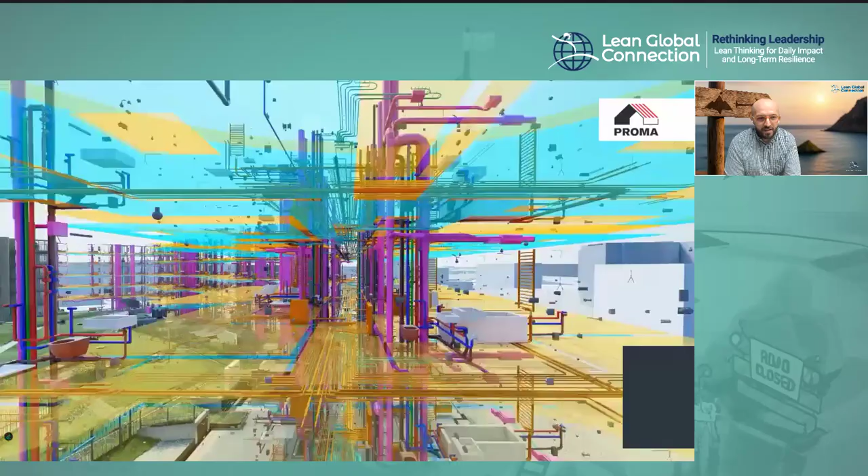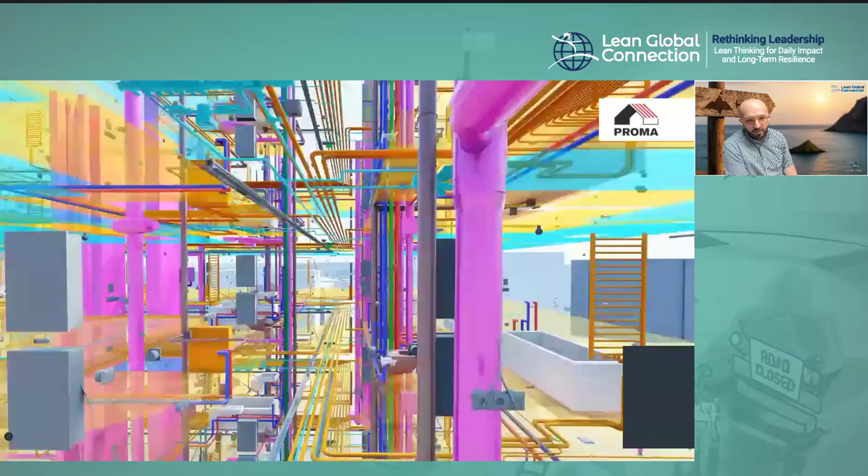It's BIM modeling. So if you are from the construction industry, you already know what it is. It's like a digital twin of the building you're going to build. This is our current project we're building in Slovakia, a project named Zwirn. And you see the detail in which we model everything. When I saw it the first time, I was totally thrilled. For the building we are going to build, we have every nitty-gritty detail.

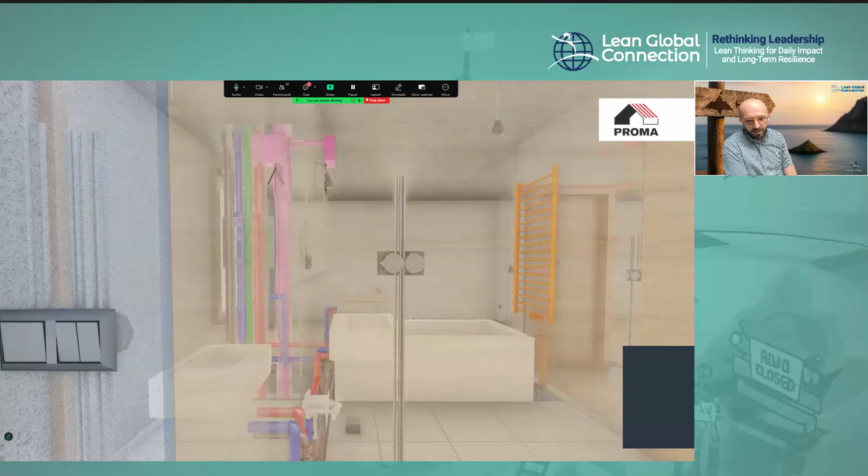You see the corridors, you see all the pipes, you see bathrooms, tubes, you see even valves in each room, on each pipe where it is necessary. So yeah, a little bit of roller coaster and introduction of how we actually design buildings. It's the 21st century, so many companies do that. I'm still amazed how the technology progresses.

And we don't just design buildings in BIM modeling, but we can even compare different ways of constructing them. We can go to gradual construction, we can go to combined construction, and we see which goes faster. So we check the construction duration time. That's the basic intro, and the main thing I like to mention, and I will come to it very often during the whole presentation, is size. The size matters in construction.

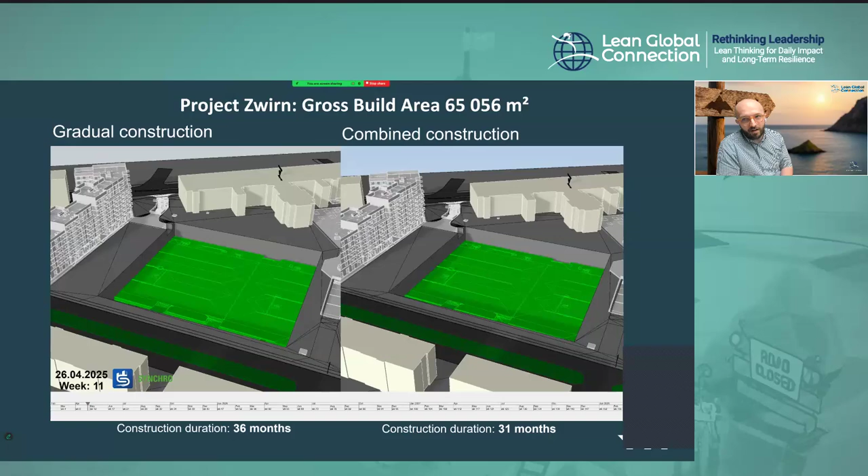You can notice that the project gross build area is 65,000 square meters. I will repeat it because this is quite important information to start with. That's how we actually define the size in construction: gross build area, 65,000 square meters. And the second thing we check is the construction duration time, so lead time in lean terminology. We can combine different ways, and we can choose the one that fits the best.

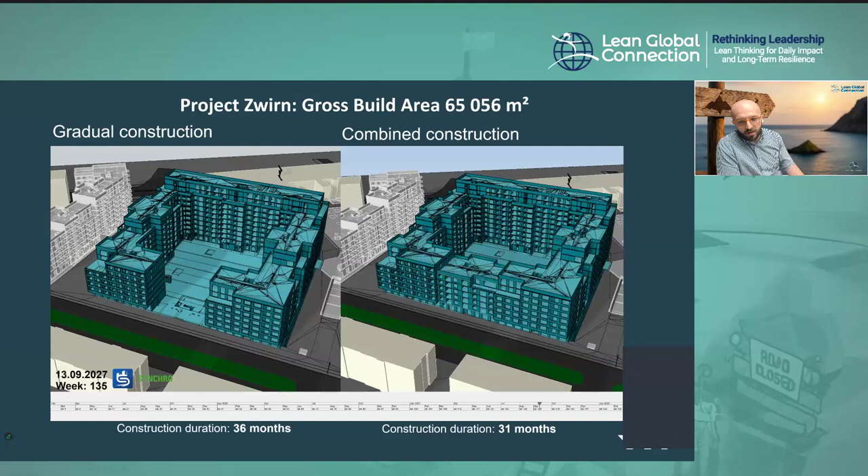If we go with combined construction, then the construction duration is 31 months. So we can even save 5 months of construction. I can tell you it's a hell of money in those projects. So yeah, 21st century, and we say this is a revolution in construction. The era we are living in now, it's fantastic. But I'll stop here.

Is it really a revolution, or is it not the revolution in construction? And I will start that this is not a revolution in construction. All the technology we already have, it's amazing, it's thrilling, it's helpful, brings a lot of benefits. But I'm going to challenge this, because this is not a revolution in construction. What we see is a productivity crisis.

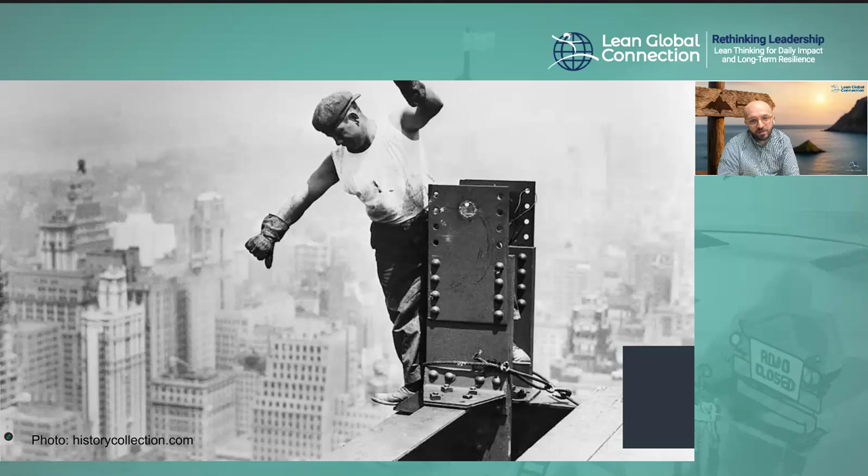And if you go to that era, and I think it's quite an amazing era, New York at that time was the financial center of the world. Wall Street and jazz and all the dancing pubs and a lot of money, and a lot of the necessity for offices got people to build skyscrapers, because in Manhattan every square meter is expensive as hell, and it was even at that time. So there was a kind of competition who builds the highest building, because the money was already there. Maybe something similar we can see these days in Dubai.

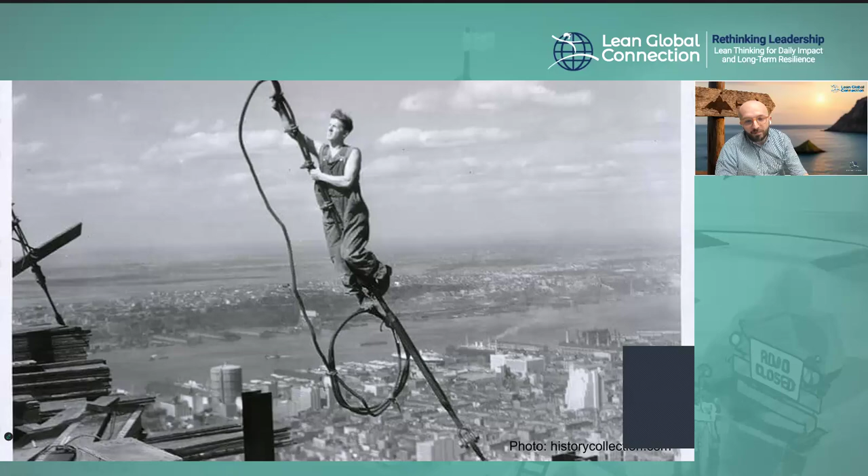But I'm going back to New York and to the Empire State Building. What's so shocking about the Empire State Building is it's maybe one of the most efficient buildings in terms of effectivity and productivity. At the beginning, I mentioned two things are important in construction: the size and the time. The gross built area for the Empire State Building is 208,879 square meters. A few slides ago, I showed you our project here in Bratislava, and it's 65,000. And the duration we are going to build this project is 31 months.

In comparison, with the Empire State Building they built 200,000 in 13.5 months, up to the height of 102 floors, and the total height is 381 meters. And then the questions come: okay, but we cannot compare that, because they had different technology, all the safety rules and regulations. Here we can stop. So obviously there were not so many safety regulations in that era, based on those pictures.

But on the other hand, if you find a track record of how many died or were injured during the construction, the numbers are not as high as we might guess. We can come to that a bit later if you want to. But that's what I mean: we are facing a kind of productivity crisis, because these days we would not be able to build such a building in such a short time. Many things changed in 100 years, and we have even better technology. We even have BIM modeling, but still, I can say this is kind of impossible.

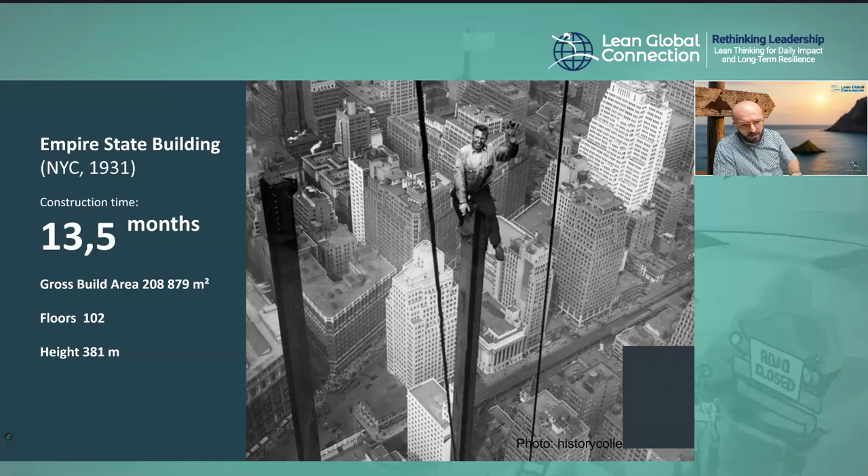But I don't want to stay only in the United States, because yeah, it's breathtaking and fantastic. The Empire State Building stayed for 70 years or something the highest building in the world. Now you go to Dubai, you see that it's not true anymore. But they built the building just after they finished the Chrysler Building just next to it, and that was the highest building, like 318 meters. This one is 381. So shocking. But this productivity and efficiency in construction didn't actually happen only in the United States.

I'll come to that. We have a similar project in Slovakia, but here I come to Lean, because if you read all the books and materials about how they built the Empire State Building, you will see something about daily huddles or daily coordination meetings. They produced in a very synchronized way. They had what we call these days takt time planning. They had a takt of 2 days for the steel construction per floor. Now it seems to be impossible.

They had just-in-time delivery of the material, just what they needed when they needed it. They got their steel beams from Pittsburgh, and there are some stories that when they delivered beams on the construction site, they were still hot, because they just produced according to what they needed. So quite shocking.

And it's shocking because now we speak about needing to bring lean into construction, and lean originated in the Toyota production system. But Toyota produced its first car 5 years after the Empire State Building was finished. And when Toyota started building cars in 1935 or 36, I guess they were far from the Toyota production system. So some principles they used here, I would say, this was lean construction already.

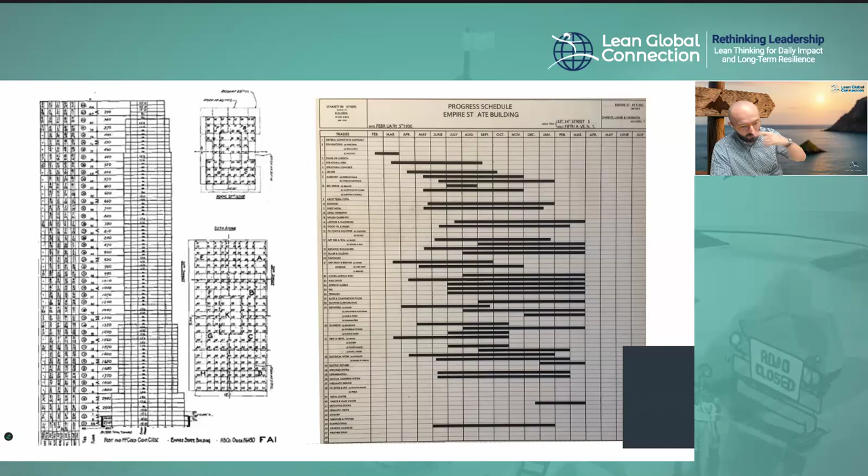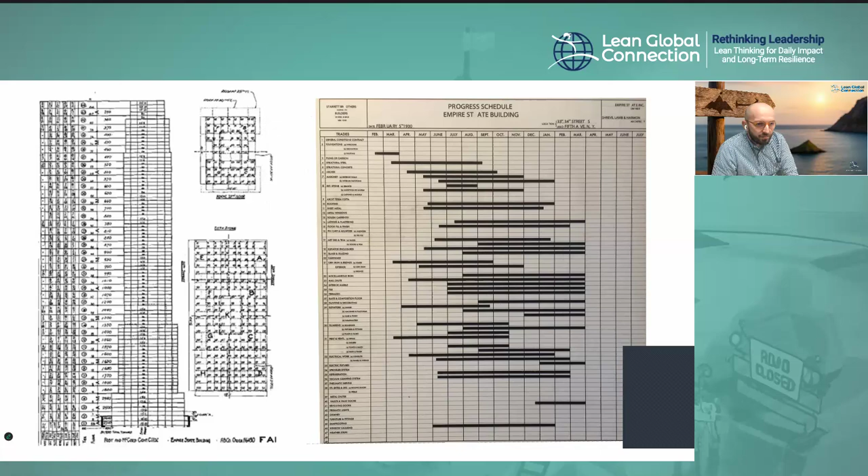So I have a theory that from the future, when the builders went to the past to build the pyramids, they made a short stop in the Roaring Twenties in the United States for a party, and they just, in 13 months, built the Empire State Building. So yeah, quite interesting. Lean principles could be found even 100 years ago in construction.

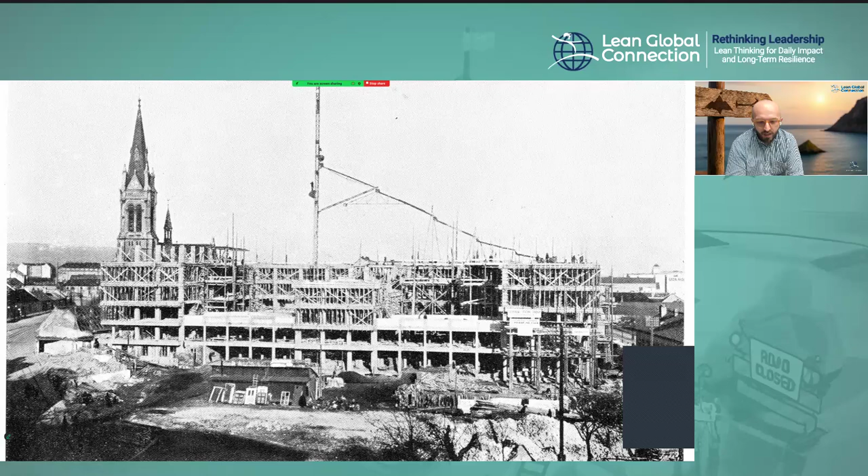And not only in the United States. What you see is a project in Slovakia. It's a residential building called Avion. By the picture, you can guess it was not built yesterday and not even 10 years ago. It was actually built 100 years ago.

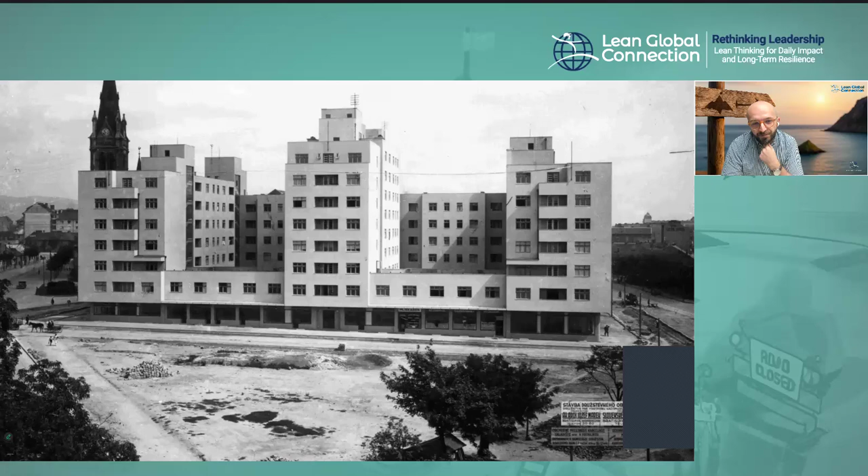And now you see how the building looks today. It still exists, and it's also very interesting from the architectural point of view. It's one of the buildings that are really nice to see in Bratislava for the location, but also for the architecture. And what's surprising is that they finished the building in the same year as the Empire State Building. They used almost the same amount of time.

So you see 13.5 months to 14 months, but the gross built area changes a little bit. So it's not 200,000, it's just 29,500 square meters. So yeah, 100 years ago, we were able to build this building in 14 months.

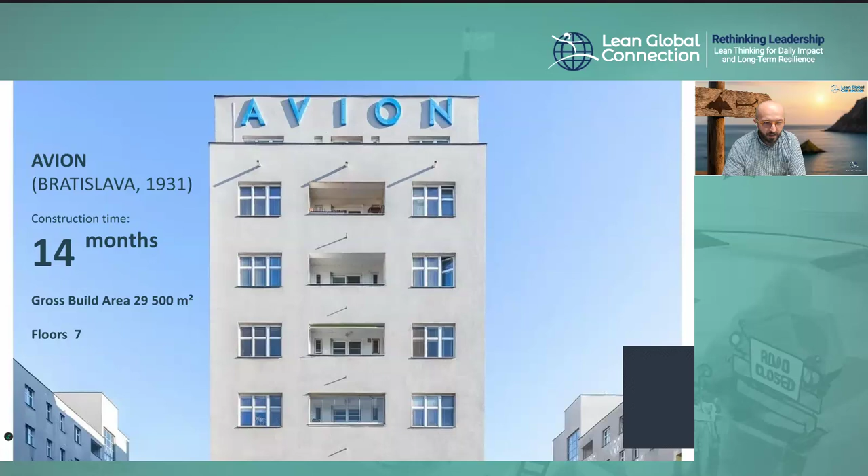And now I come to a shocking truth, because we did some calculation in our company. We took our historical data. Now we're able to evaluate how long it takes us to build different buildings, so we can easily compare with competitors or ourselves. And the question for you, if you can guess: how long would it take us to build this building now with the knowledge and technology we have? Just a really rough guess.

I'll tell you immediately. It's 27 months, based on our historical data of how we build projects. So yeah, we would need double the time to build this building now. That's what I say: we are in a productivity crisis. We cannot repeat our previous successes.

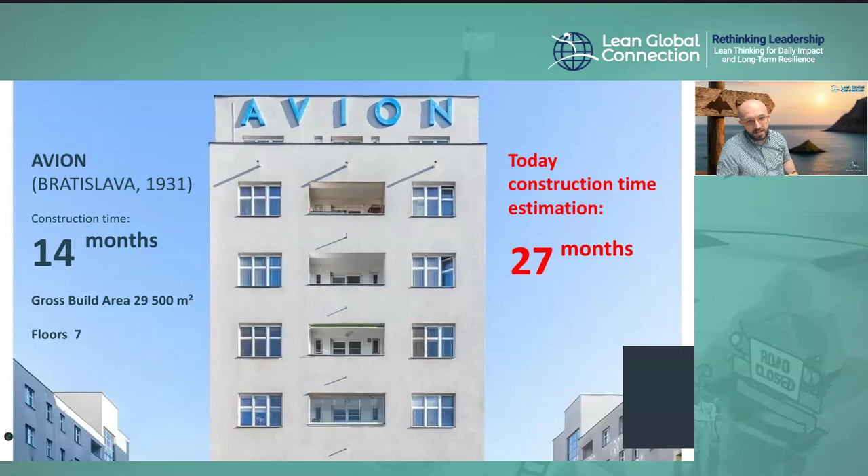So that's actually how I entered the construction business. I had some experience in lean, in designing production lines, in logistics, takt and cycle times, lead time and everything, but in manufacturing, not in construction. So I came here and they said, okay, nice, we'd like to have you, but here is the issue. We need to do something with that.

What I learned in Lean is that everything starts with lead time. I watched the previous keynote by Michael Ballé, and he mentioned one thing which I had to notice because of my confirmation bias: you need to understand the lead time. So start with understanding lead time. That's actually where I started here. I started to look where the lead time is, what it means, and what the financial effect of the lead time is. We are in a project-driven environment.

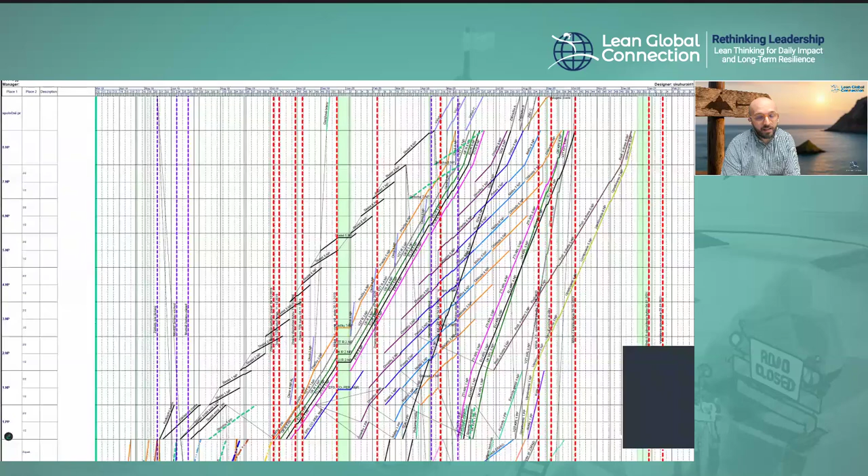So I said, okay, construction, lead time, show me the diagram. They showed me the plan of how they build. When I saw it, I said, what a mess is that? Now, after 1 year, I can tell you this is actually not bad planning for construction. It's actually quite good. It's from our real project, a few years old, and there are some lean principles even in this planning. But for a newbie, it was a complete mess. We can work with that, and I'll show you an even better version.

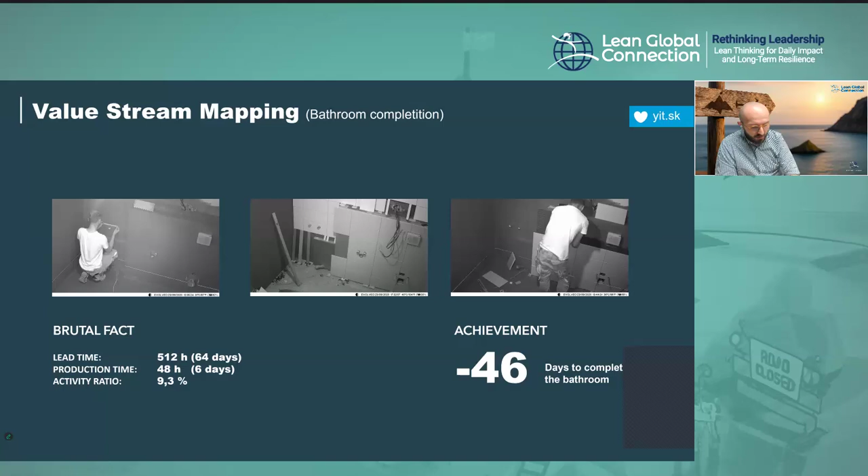But that's one way of looking at things. What if I tell you that we are able to decrease the time to 0 just by using prefab bathrooms? A company builds them outside and we deliver them to our construction site, and the bathroom is already ready. So we can look at shortening the lead time from two perspectives: applying methods or changing the technology in which we produce.

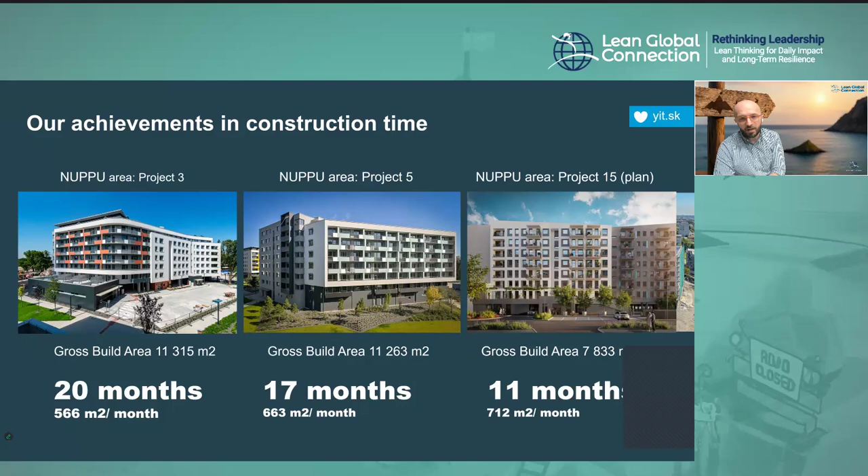Very briefly, some achievements in construction time on three projects. In NUPPU area you see 20 months, 17 months, and the last project we are building currently, it's in plan. Of course, it's a little bit smaller, but it's also quite a bit shorter. So we are continuously shortening the time it takes us to build our constructions. So again, coming very quickly to diagrams, how we actually check what we do.

One thing to add, we are even improving the way we plan and how we re-evaluate schedules. On the left side is NUPPU area project 5. We actually updated the schedule once in 2 months. Now on the projects in NUPPU 15, we check them each week, and we update, follow, and check if we make progress.

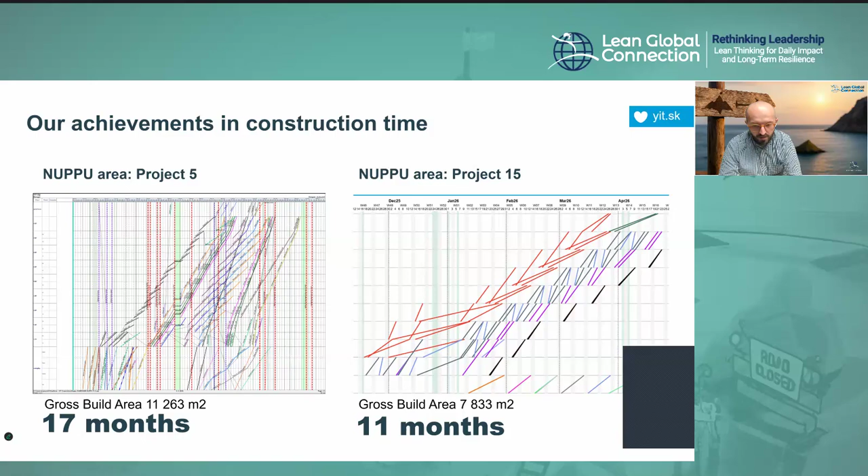So I see the reminder, Marek, yeah. We have 6 minutes and 3 questions in a row. So if you can summarize the key messages. So then I go very quickly to

digitalization. One thing to tell you is that we are a strong matrix organization, working on projects, therefore looking at the lead time mostly from the project perspective. And the last thing, which is interesting because I like to speak about AI, and I like this joke a lot, and I found out that only I understand this joke, so I'm sorry.

I don't know how many of you saw the Terminator movie, but this poor lady was fighting her whole life against AI, and now we have AI everywhere. So also in YIT, we look at AI and how we can use it. But I can tell you from many use cases, the small applications like ChatGPT or Copilot or Claude, they will not save us. What will save us are maybe bigger applications like startups. They are implementing the AIs into their products.

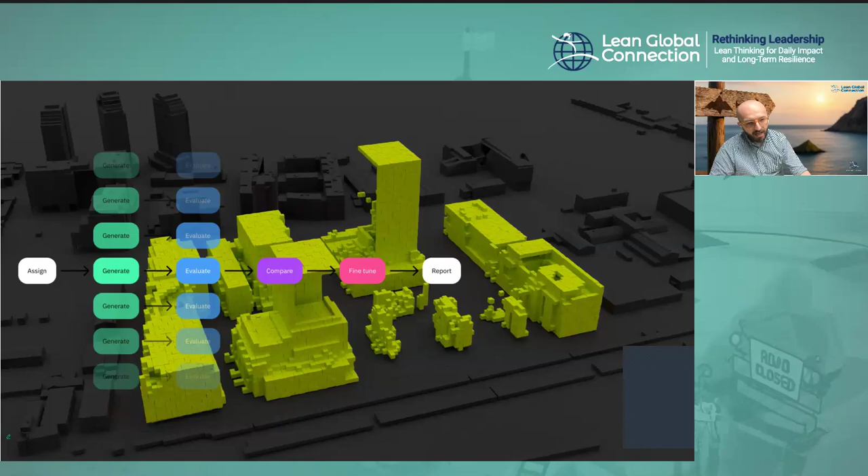And we have one which we cooperate with. It's Kubu, a Slovak startup. And here I'd like to mention that we take lead time seriously. So we don't look only into construction, how long it takes to build. We also look at the design. How long does it take to design the building? How long does it take to plan everything and to deliver to customers? So really end to end, and we have the benefit that we cover the whole value chain, starting with acquisition and finishing with selling the last flat to the customer.

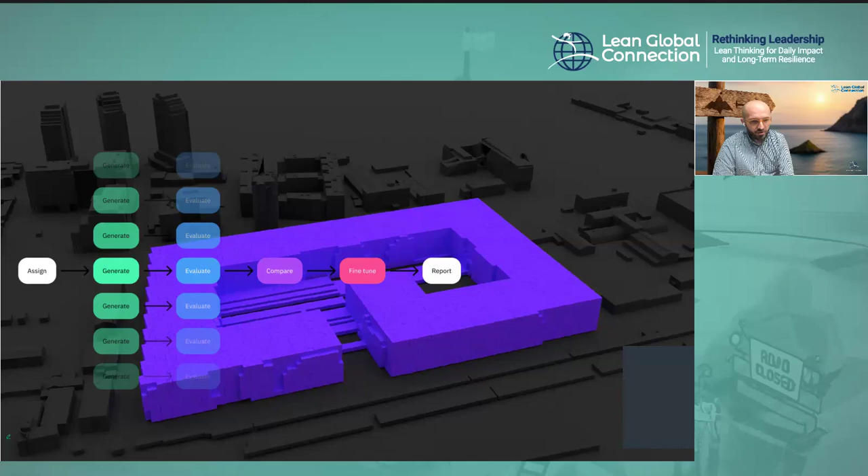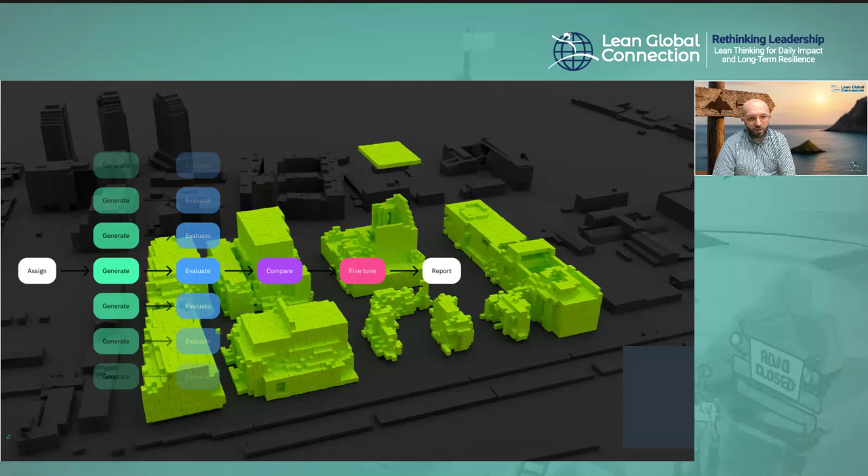So now we are working with a startup, and we are developing together this generative design. They have the know-how, we have the data, and now we are able to rapidly shorten the time to design. So you see, directly at the beginning you can put all the information you require in the system, and the system designs for you the best possible options for how your construction should look. And it goes from the area, the level of the building, down to the single flat and designs it.

One important thing to say, I very much like the approach, because the approach to design changed a little bit with this AI. Now we are not designing what we want. We don't put into the system, I want the building this high, I want to have this light in these flats, and I want to have it facing this area. They do it vice versa. We put all the constraints, the regulations, all the laws that are related to that into the system, and let the system play with it. So after thousands of iterations, we have the right one which really fits the criteria and is not violating any of the constraints.

Maybe here fits very well the question of Irena, because we have 3 minutes. Which kind of data did you need or use to build the simulation of building construction? Yeah, we have our concept of how we would like to build. We use quite a lot of prefabrication. We have our modules. We developed a concept of how we want to build, how our building should look, what components it should have in it. So that's how we were able to fill this software with our data. And there is some general regulation in construction which we follow as well.